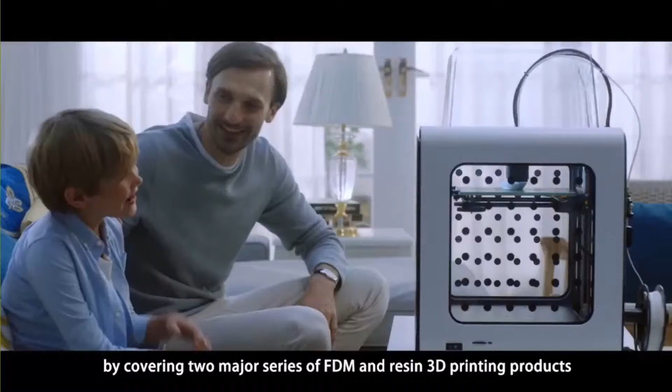FDM, and resin 3D printing products.

Using excellent customer service, we win the reputation of industrial users ranging from across the world. Besides, we also maintain cooperation with domestic and overseas renowned enterprises, colleges and institutions. We mark the sailing navigation for the followers with our focus on breaking down the dull routines. We spring at the tip of industry cutting edge and at the standard of the industry to astonish the era with the height of 3D printing.

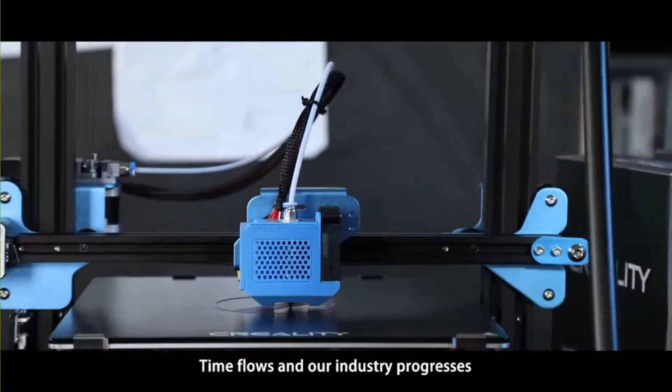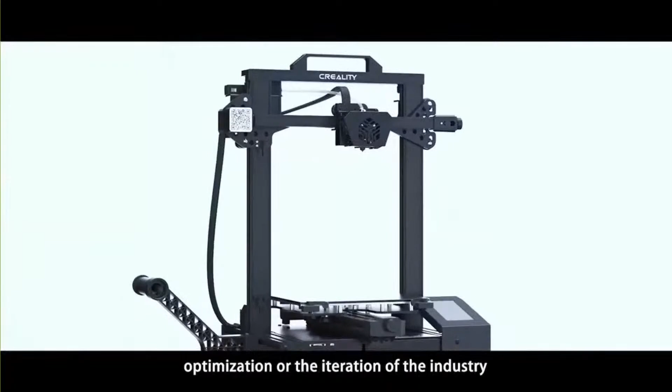Time flows and our industry progresses. Footed at the current, we're always targeting at the future. Bearing the responsibility of industry development, we always advocate industrial contests and implement technological innovation. We promote industry development and present the enchantment of 3D printing through establishing the one center and two wings new pattern of Creality. No matter exploration, optimization, or iteration, the industry's activities are all generated for the virtuous cycle of industry development.

We are not only the evangelist of 3D printing, but also part of the society. Hence, we devote ourselves actively in educational assistance and deliver knowledge and hope to the next generation. We give a helping hand to fight the pandemic and assist in the domestic and overseas contracted areas, delivering our responsibility and boldness. Viewing from the top of the industry summit, we are building a 3D printing world and depicting its future.

The road always extends after another road, and numerous spaces always exist beyond limited boundaries. Standards have no tops, always stretching their borders like an endless ocean. When we arrive at the peak, we'll see the Empyrean, but there's still more distance ahead. Creality, create a 3D industry future.

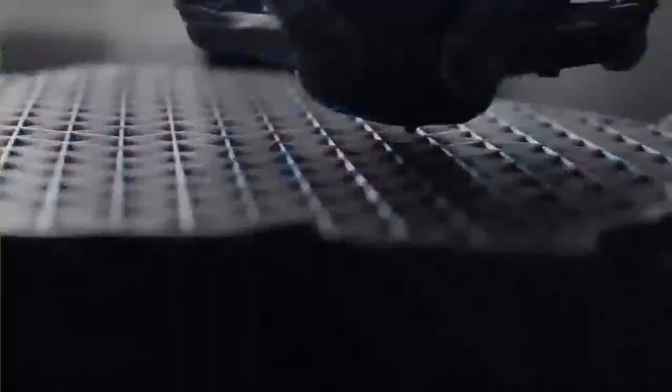8 months have passed since the start of 2022. What are the newly upgraded models, and what are we going to release in the rest of 2022? In this summer upgrade, Creality will take a rewind of its newly defined Ender system and resin printers, along with the surprises brought by our accessories and Creality Cloud.

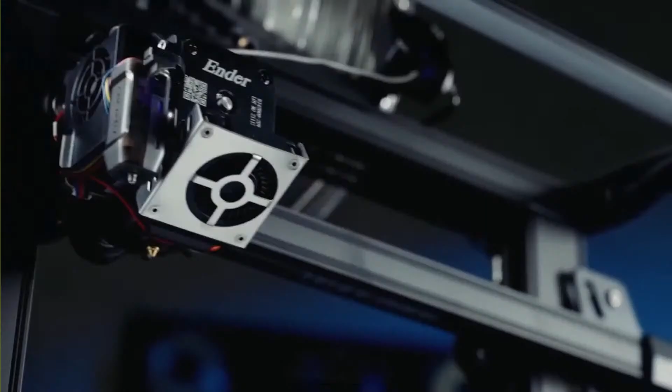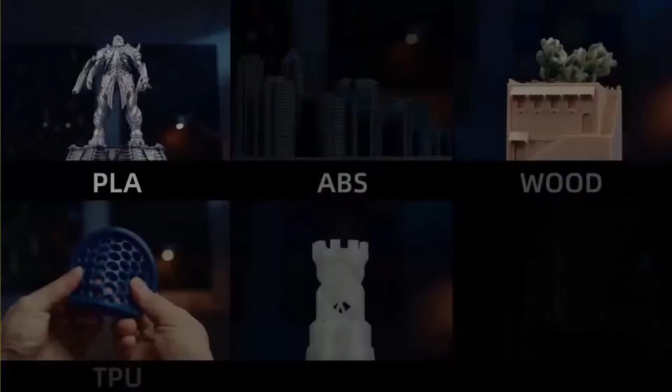There's a saying that goes around the 3D printer industry: if you are familiar with FDM printers, you probably heard about Ender. Back in 2016, 3D printers started to become popular as a desktop workshop, but the quality was much different at the time, which brought a lot of bad using experiences to users. After learning the pain points from users, Creality chose to stick with users' needs and came up with the Ender series in 2017.

It is a significant product to both Creality and the market at that time because of its powerful abilities, reliable quality, and rather budget price, which made 3D printers truly affordable to users and helped them have fun in the world of 3D printing.

Until that time, the Ender system had not only released its phenomenal product but started to become the leading 3D printer manufacturer, and the market share also reached number one around the world. Now, the Ender line has been sold to over 192 countries around the world, with a total of 2.7 million Enders being used by our users in areas of education, art piece creation, and industrial manufacturing.

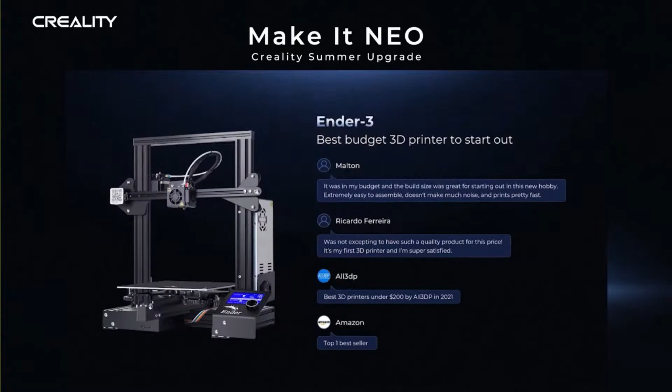As the most budget 3D printer, let's take a look at what our users say about the Ender 3. Malton says it is under my budget, the print size is super friendly to beginners because it's easy to assemble, and the print speed is also quite acceptable. User Ricardo Ferreira says it's my first 3D printer and it's worth the price. Very satisfied.

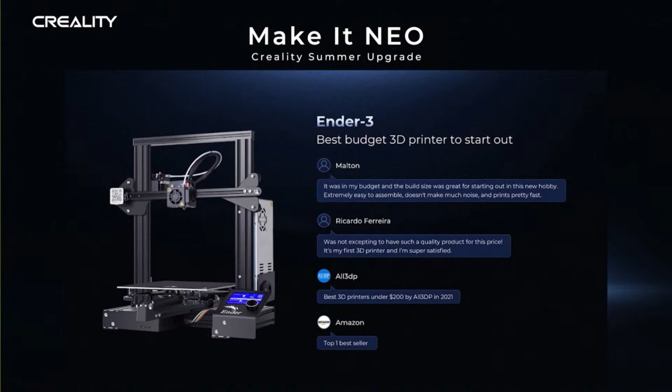All3DP has also given Ender 3 the title of best 3D printer under $200. With Ender 3 V2, it is also a well-embraced product by our users because of its design and functions performance at the entry level. User Mr. Bob commented it is the best beginner 3D printer ever, it works great out of the box. If you're looking for a top-of-the-line printer at its price, look no further. PC Mag also gives the comment of a classic open-frame 3D printer.

As to Ender 3 Max, with the best print volume and quality relative to price, user Garvin said the quality and bed size relative to its price is absolutely fantastic. It can print both quiet and smooth. Website 3dprintbeginner.com comments it is probably the best choice for high print quality at relatively low costs.

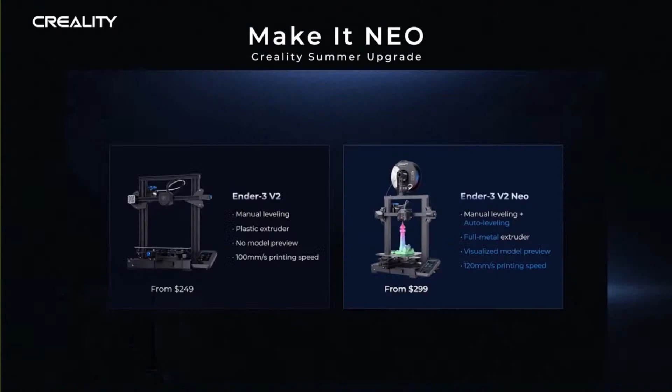Ender 3 V2 Neo can now support both manual leveling and auto leveling. Instead of the plastic extruder, it upgraded into a full metal extruder to make it more powerful and reliable. To make it more friendly to beginners, we also changed the UI system to visualize a preview of the model.

With Ender 3 Max Neo, we upgraded the single Z-axis to dual Z-axis, from a 3.5 inch monocolor screen into a 4.3 inch RGB color screen. It now comes with a built-in power supply, which makes it more stable, and added auto leveling to make it easy to use. Along with its 300 x 300 x 320 millimeter print size, Ender 3 Max Neo is more stable and efficient. At the price of $399, the Max Neo is experiencing a discount, so you can get it at only $369 at the moment.

The above new lineup products are all equipped with CR Touch auto leveling and Bowden extruder, which is light and precise. If you are interested in DIY possibilities, you would definitely love it.

For direct drive extruders, we have our self-developed first generation Sprite extruder used on our Ender 3 S1 series, mainly aiming at designers, art piece creators, and startup businesses. S stands for Sprite. It is a type of self-developed direct drive extruder with full metal dual gear, which gives itself more power to extrude the filament while keeping the nozzle clean and clear. It also allows users more options in choosing filaments like PLA, TPU, PETG, and ABS. With this extruder, you can explore more possibilities in 3D printing.

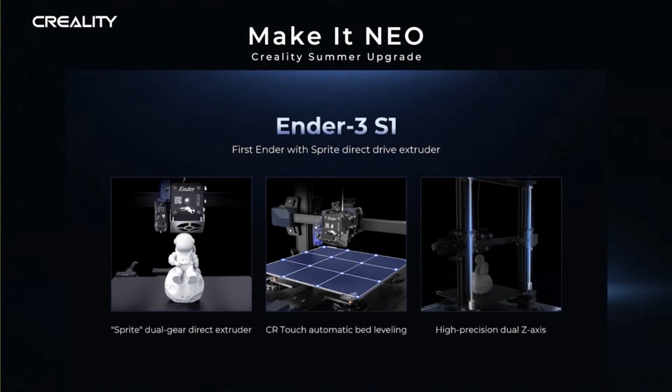You can take a rough look at these reviews by our users and professional media. The best 3D printer under $500 has proven its popularity. User Lee said, excellent for beginners to medium starters. I was brand new to 3D printing, and with the help of YouTube, now I can print within 0.1 millimeter tolerances.

For the Ender 3 S1 Pro, we added a full metal Sprite direct extruder that can bear 300 Celsius degrees, allowing more printing scenarios and supporting more kinds of filaments like PA and PETG. The knob screen has also been upgraded to a 4.3 inch touch screen, making it easier to operate. Other considerable details have also been added, like the top LED light bar for dark environment printing, and handles on the hotbed, just in case it's too hot to drag out.

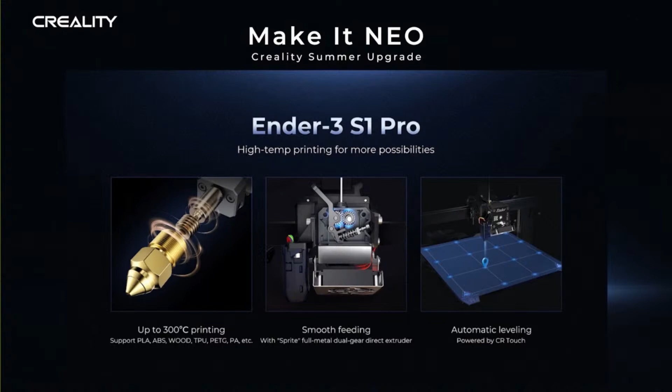User Andrew said that this printer only took him 30 minutes to assemble, and he ran some high temp test prints straight out of the box, and the print quality is amazing. Gadgeteer.com said it is one of the best sub $500 printers on the market.

When it comes to the Ender 3 S1 Plus, it has a bigger print size of 300 x 300 x 300 millimeters, along with synchronized dual Z-axis, auto leveling, and filament sensor. With the help of the dual Z-axis structure and CR Touch auto leveling, it's much easier to print the first layer. For startup businesses and workshops, the S1 Plus can greatly enhance manufacturing efficiency.

Here's a comment from 3dprintingindustry.com saying that Creality has priced the S1 Plus at just $529, giving budget-conscious beginners, hobbyists, and prosumers a cost-effective way to 3D print polymer models larger than ever before.

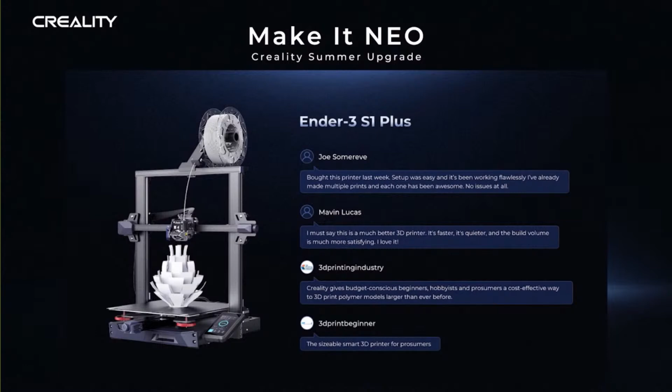Here, I put the Neo series and S1 series together just in case you are still confused about our Ender system, and yes, it is indeed highly likely to happen. Some of you may also want to know which type exactly fits you best, since there are many types in the Ender system.

Well, if you have a preference for Bowden extruder, you can go with our new lineup. Probably the Ender 3 Neo is a good choice for you if you have a limited budget, at only $219, since it has been upgraded with CR Touch auto leveling and a full metal extruder.

For a better using experience, you can go with the Ender 3 V2 Neo, because it has added considerable functions like a toolbox and tensioner, and the visualized UI system also makes it more user-friendly. The selling price is $299, probably the best FDM printer you can get under $300.

For the Ender 3 Max Neo, at the price of $369, you can get a larger print size printer to print bigger models or multiple models at one time.

If you would like to explore more possibilities with various kinds of filament, or you prefer a direct drive extruder, the S1 series would be more suitable for you. Starting from only $379, you can get the very standard model, the Ender 3 S1. With the Sprite extruder, you can easily play with soft filaments. For further accessories, you can also try out the laser module and the water cooling system.

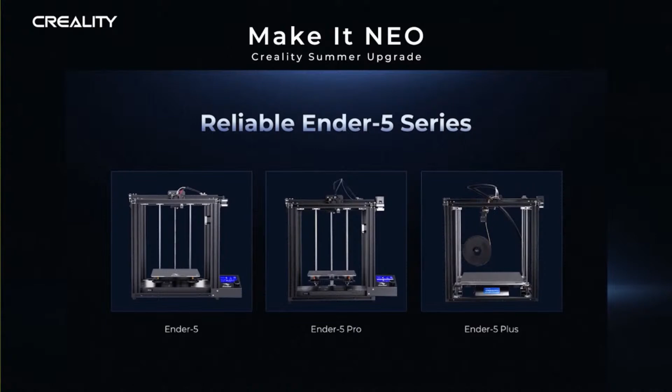Recently, we released a newly upgraded lineup, the Ender 5 S1, and yes, we have brought the Sprite direct extruder onto the Ender 5 series this time. But not only for the extruder, we also made progress on its print speed to a large extent. For more information, please keep an eye on our official channel.

The Ender lineup is a significant product line for Creality. It has successfully been applied to different industries and workshops by our users, which helps empower their creations. So shout out to users all around the world supporting us. We will keep exploring more creations and applying more practical functions. By doing this, we can continue to stay accompanied with our users. Thank you.

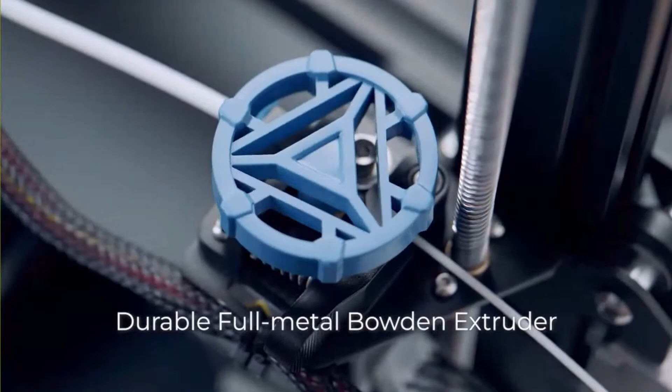All right guys, after we've finished telling the story about the whole Ender lineup, and most of the information has been given to you at this moment, I know you guys have a lot of questions in your mind, right? I can now read through all your comments, and I just saw someone saying that Larry's got a thick accent, which really makes me embarrassed, but that's okay. So guys, it's time for you to ask all your questions that are on your mind. Any concerns you have can be put into the comment area, and I'll pick 5 different questions from you guys. So now you guys can do it, okay?

Right, I got a thick accent. So I got a combination of Australian accent and a bit of Chinese accent as well. Yeah, thank you, Irving, for saying that.

So we have the first question coming from Andrianala asking why Creality released new printers after the Ender 3 S1 series. That's a good question. The Ender 3 S1 series targets a different group of people compared to the Ender 3 Neo series. The Ender 3 series are quite popular in the market, so we wanted to bring upgrades into things like the Ender 3, Ender 3 V2, and Ender 3 Max. We brought them smart functions that make them easier to use, and wanted to bring a new experience to you guys. We added things like CR Touch and redesigned the whole UI visualization system. So yeah, that's why - it's targeting a different group of people. So we can move to the next one.

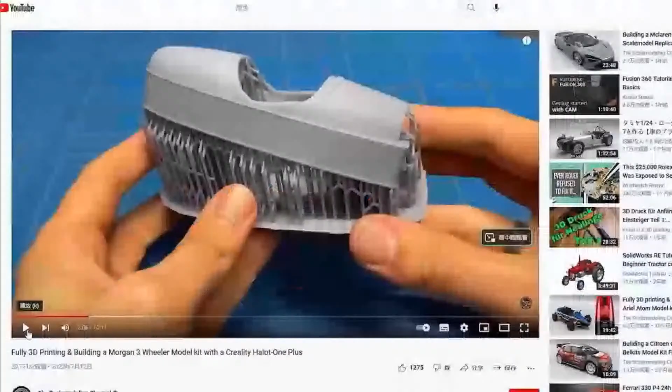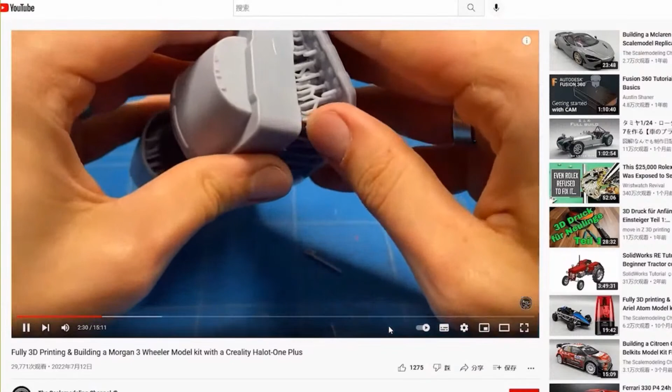Now let's take a look at some videos and pictures from 3D lovers made by the Creality Halot-One series. Cleaned up and then moved onto the bench to remove all of the supports. I am removing the supports before I do the final cure on the parts, therefore the part is still a bit flexible and doesn't tend to break as easily as if it were already cured. That's just personal preference and makes it a lot easier on me. I should have also worn gloves, but I kind of forgot. I quickly turned on the camera and started removing them out of enthusiasm. But be careful, this stuff isn't really all that great for your skin, so wear gloves and don't be an idiot like me.

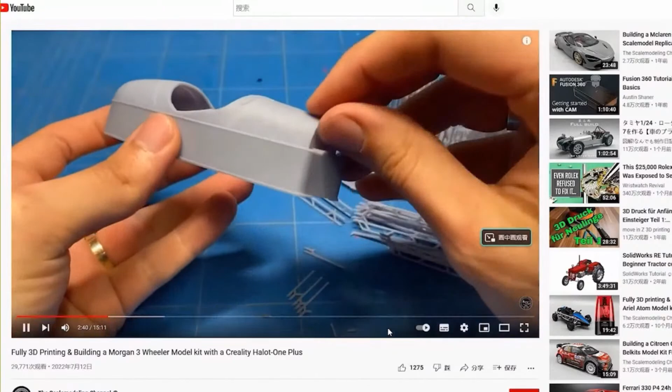Halot focuses on resin 3D products, continuing to dedicate the full set of 3D printing experience with service-oriented guidance. After 2 years of updates, Halot has completed the layout of 3 product technology updates on the integrated light source system. Both the uniformity and accuracy have had incredible breakthroughs. The Creality Halot-One series, like Halot-One, Halot-One Pro, Halot-One Plus, are the most user-friendly portfolio of resin 3D printers. They have adopted the newest integral light system for Pro and Plus, with new upgraded precision dual rail Z-axis models, as released this April.

3D printed art doesn't only represent the sculptures made by the 3D printer, but the printer itself can be part of the art. As you can see, navy blue and wine red are two colors that attract your attention. The function of the resin lid is to block light from outside the case, as well as to stop the UV light from leaking out of the printer.

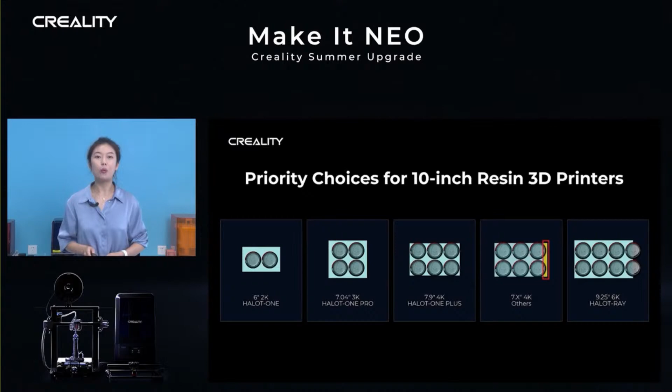As new products were released, we increased the printing surface to 9.25 inches. The size is the same as 6.5 cans of Coke.

Based on lots of resin enthusiast suggestions, our team has created Halot Ray, designed for the prosumer market. Halot Ray can satisfy 3D lovers who are dedicated to large size and high precision 3D models. It's Creality's first resin 3D printer that leads from industrial use to consumer markets at an affordable price.

It has 4 competitive advantages compared with other printers in the market: 9.25-inch screen with 6K resolution, high light evenness, automatic model repair, and device software and cloud synergy.

So now, let me introduce more about Halot Ray. It's a good choice for 3D lovers since it advances air purification and a thermal system, an automatic material feeding and recycling system, which expands the market from business use to consumer markets.

The 9.25-inch screen enables a 198 by 123 by 210mm build volume, an 11% increase in printing volume compared with an 8.9-inch screen. The screen also features 6K resolution, which can deliver exquisite model details.

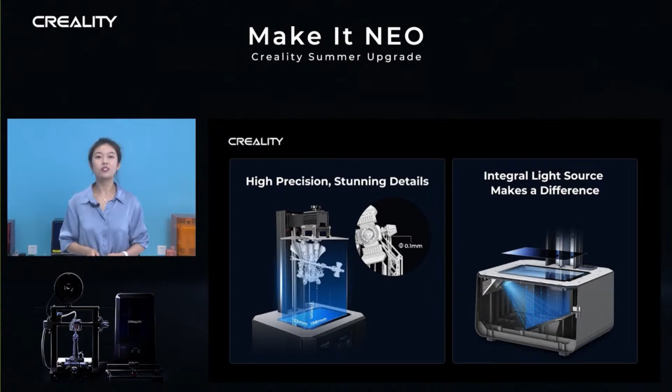It can print 0.1mm micro holes for models with complex structures and speeds up printing with a screen of 7% high light transmittance. Our self-developed integral light source boosts 5,500 microwatts per square centimeter light intensity and ensures print success across the whole build plate.

Upgraded Halot OS supports device software cloud synergy. It allows users to print through various methods like a USB flash drive, Creality Cloud app, Halot Box, and the online model library of the printer. With OTA updates, you will always get the latest features.

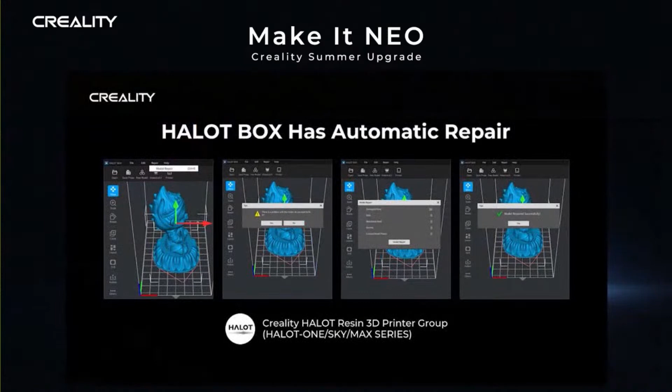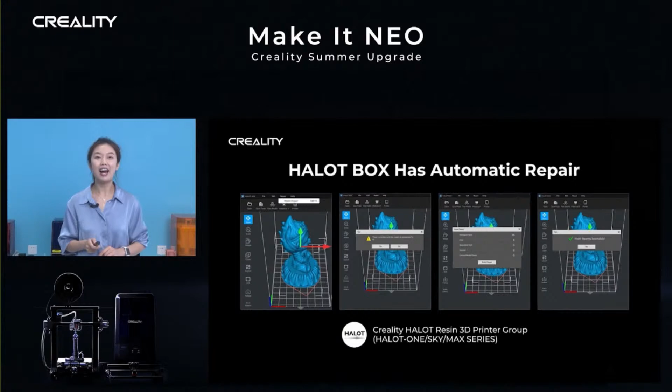At this point, you may want to know the price of it, right? So now, the Creality Halot Ray sales price is $660 USD.

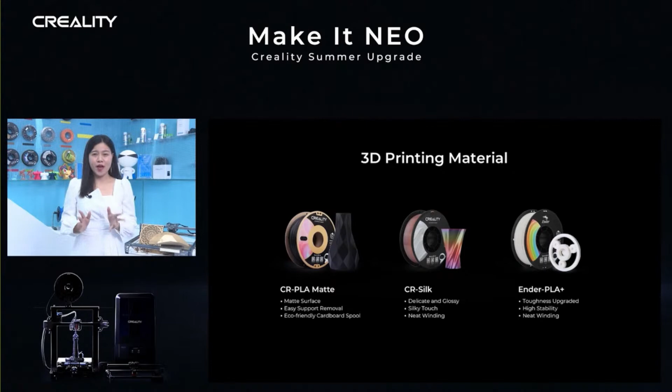And the PLA Plus is an upgraded PLA filament that enhances the toughness of filaments. It can be reused and will have more stable printing performance.

Our high fidelity model resin is perfect for printing high performance garage kits with a matte texture, highly reproducing the best characteristics of the model with clear details, and is easier to sand and color.

Our CR Silk dual color filaments print models with dual color fantastic changes, providing the model with a delicate and silky glossy surface.

At the beginning of 2022, Creality released the new consumer 3D scanner, CR-Scan Lizard. It suddenly hit the market hard. CR-Scan Lizard has cool features that surpass almost 90% of the consumer 3D scanners in the market.

It has high accuracy up to 0.05 mm, enabling users to capture the finest details of objects. It's really easy to use without complicated scanning steps and process. Most of our users consider it a useful tool for modeling.

In June 2022, Creality launched the new software, CR Studio 2.0 version. The new software is compatible with both CR Scan 01 and CR-Scan Lizard, and the 3D scanner is also available with Windows 10 and macOS computers. It supports free OTA online upgrade, bringing real-time surprises.